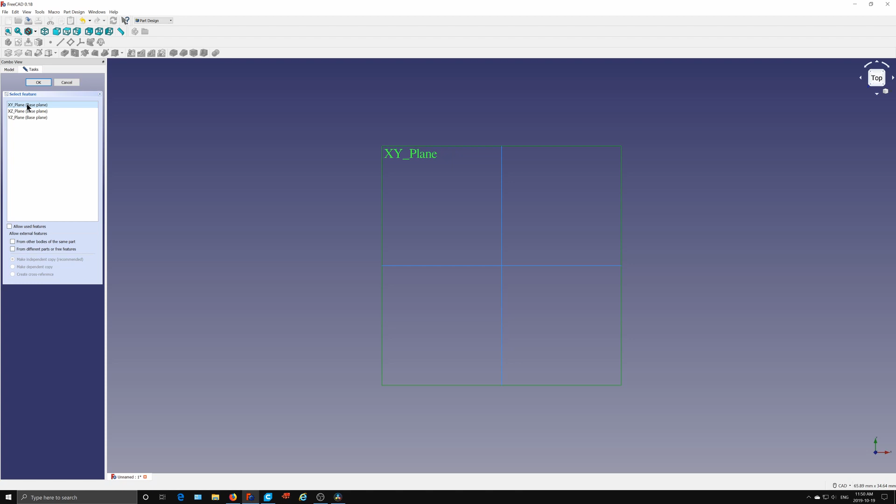To begin with, the program has to be set to this option here, part design. Now I click create a new document, then create a new body, and create a new sketch. I want to set the base plane to the XY base plane, and click OK. So now I've got a new empty drawing document.

The sugar water feeder is basically going to consist of 4 circles manipulated in different manners, and I'll show you how quick and easy it is to do this. You click the circle drawing tool, draw a circle somewhere near the middle of the XY base plane, then click on the center of the circle, click on the center of the XY plane, and click this button here which centers or aligns them. If I do that same alignment on all the circles I'm going to use, everything's going to be concentric and even to each other.

So now I have this circle on the screen. I want to enlarge the circle to the outside dimensions of the dish. I've already figured that all out, and I want the dish to be at least 5 inches across, which equates to 128 millimeters. Now this program measures the circle from the center to one side, so for 128 millimeters, I want to make this circle setting here 64 millimeters.

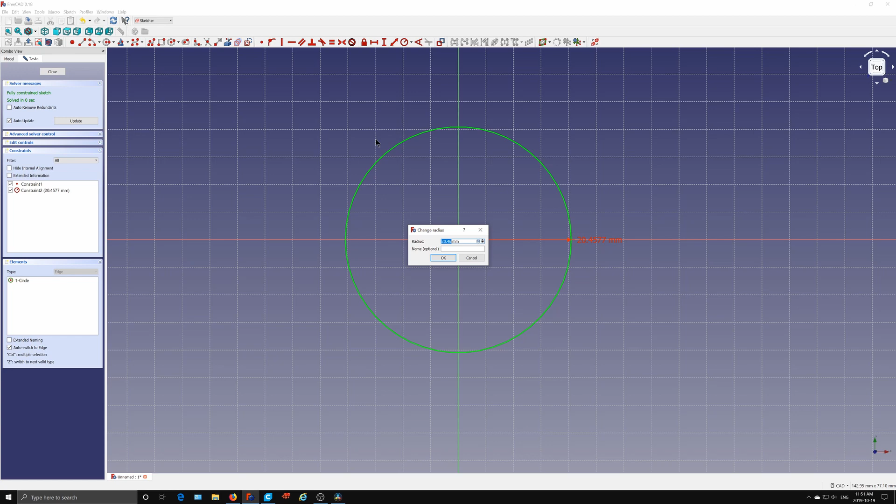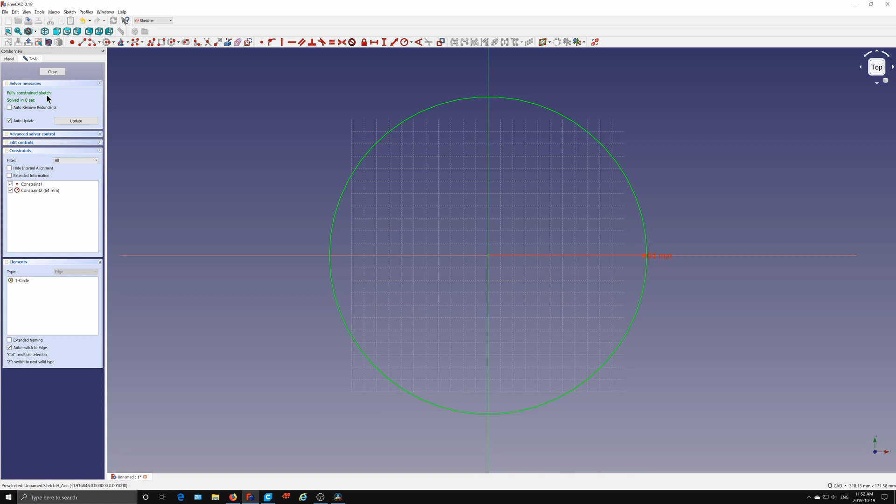I click on the arc function up here on the top, and then this dialog pops up and I can enter 64. You see that immediately enlarges the circle—I'll just zoom that in a bit. Now you see here on the top left it says fully constrained sketch, which means that's a closed sketch, and that you can do another operation on it now.

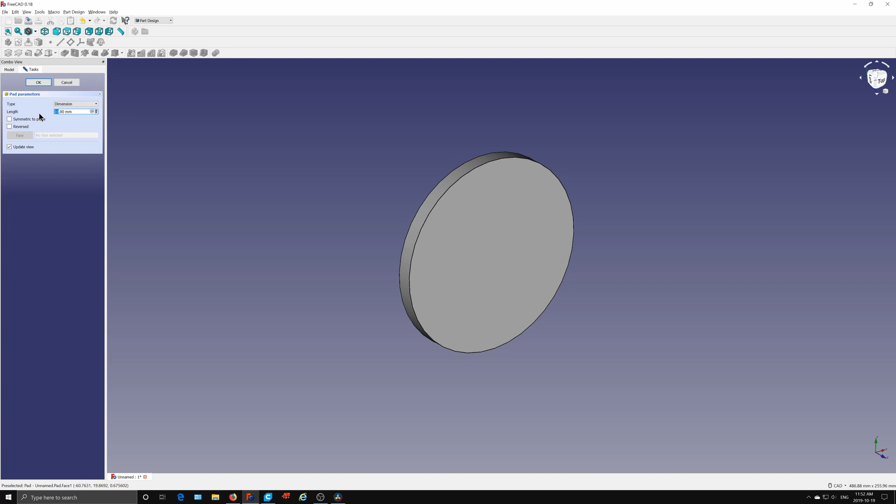So click close. Now I want to pad that circle. I click the pad function, and it's gotten big again—move it back to the center, and tilt it a little bit. Now you can see that circle has turned into a disc. The default dimension for a pad function is 10 millimeters, but I want the dish to be 64 millimeters deep, so I just enter 64, and that stretches that circle out into a cylinder that's 64 millimeters from the top edge to the bottom edge.

I click OK. Now I want to make the inside of the dish. I click on the top of the cylinder, go up here on the left, create a new sketch, grab the circle tool, draw another circle, and center that circle. Then I want to set this circle to 63 millimeters. Now you can see that circle is just shy of the outside diameter, which is going to give me like a 1 millimeter thick wall on the outside of my dish. So now that's fully constrained over here on the left.

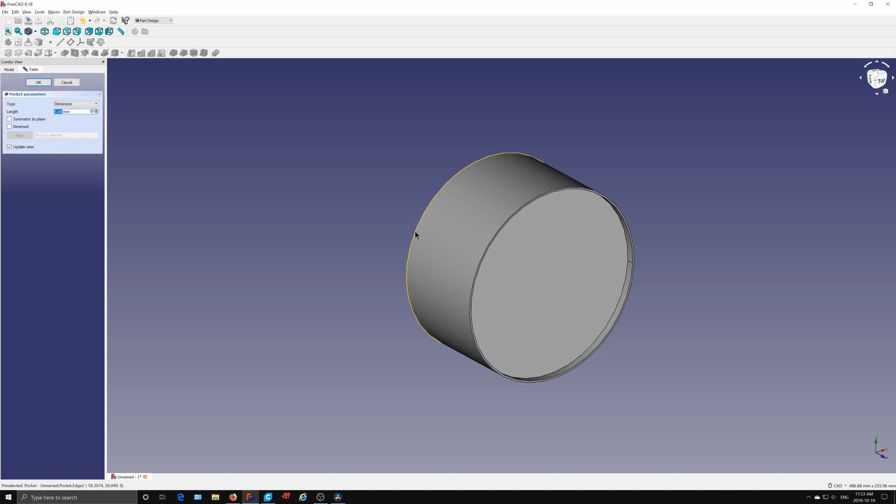So I close that, and now I want to do what's called a pocket function, which is basically going to make a hole. I want the bottom of this dish to be 1 millimeter thick. Seeing the outside dimension is 64, I want to make this pocket 63 millimeters deep. And there we have the outside of the dish with the bottom.

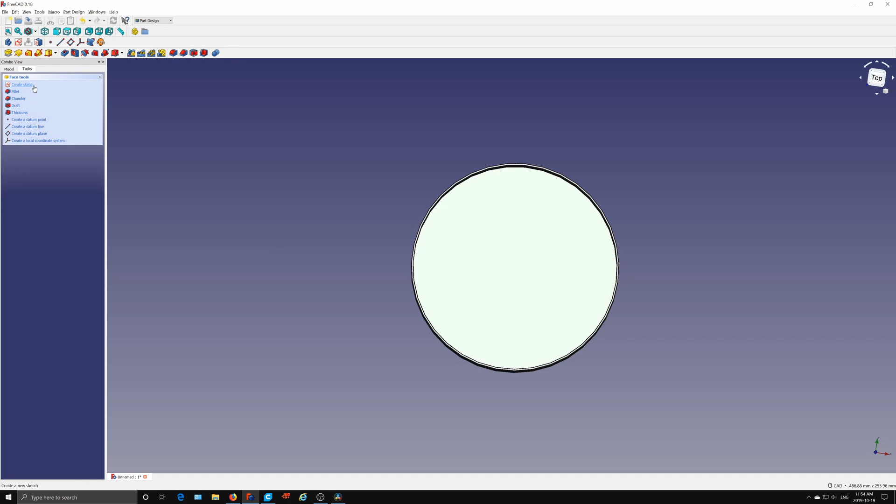Now, to make the center part, you click on the bottom of the dish, create a new sketch, put another circle in the middle here, and center that circle. Then I want to set the dimension of this circle to roughly 2 inches or 50 millimeters. So I click the circle function, and change that to 25, which will give me a 50 millimeter wide circle.

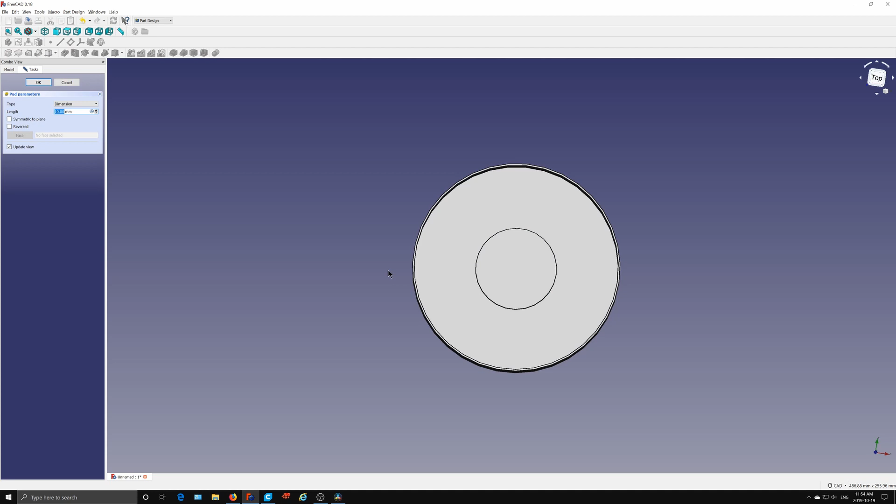Now that's fully constrained up here again, so I can do another operation on that, and I want to pad that. Tilt this over a bit. Now you can see that center has been padded up 10 millimeters because of the default 10 millimeters that the pad function does. I want this center post to be 50 millimeters high, and seeing that the bottom of the dish is 1 millimeter thick, I want to make this post 49 millimeters.

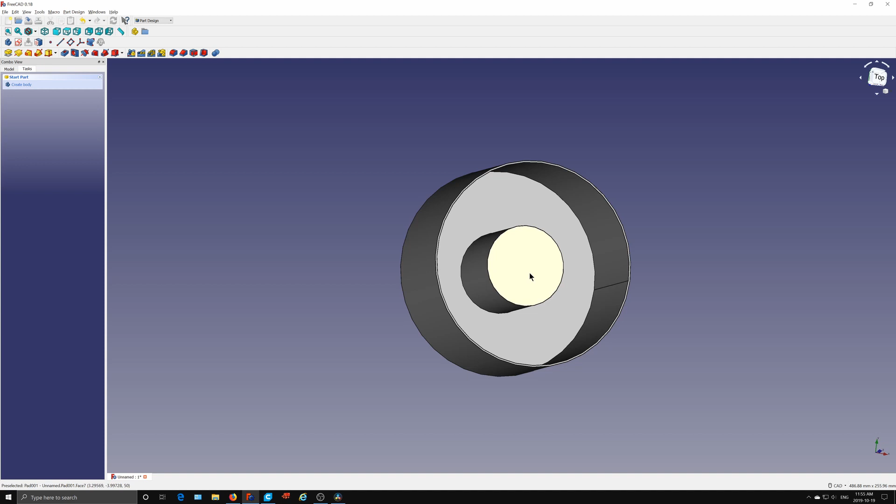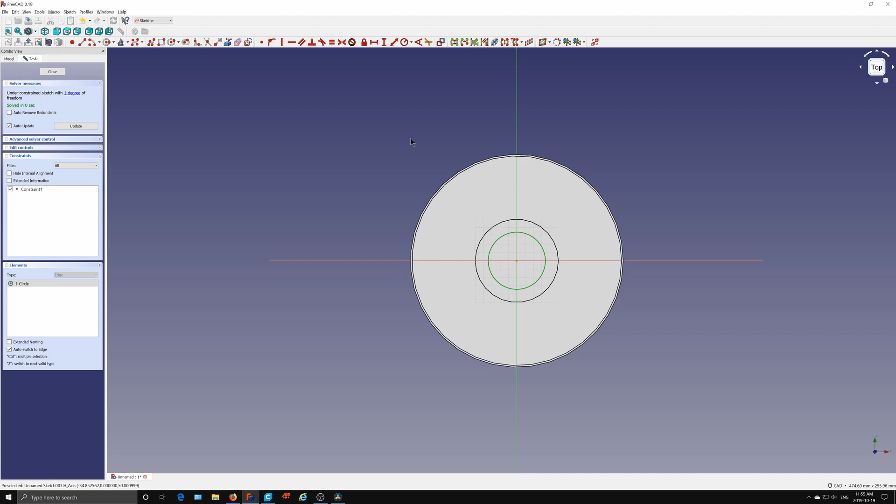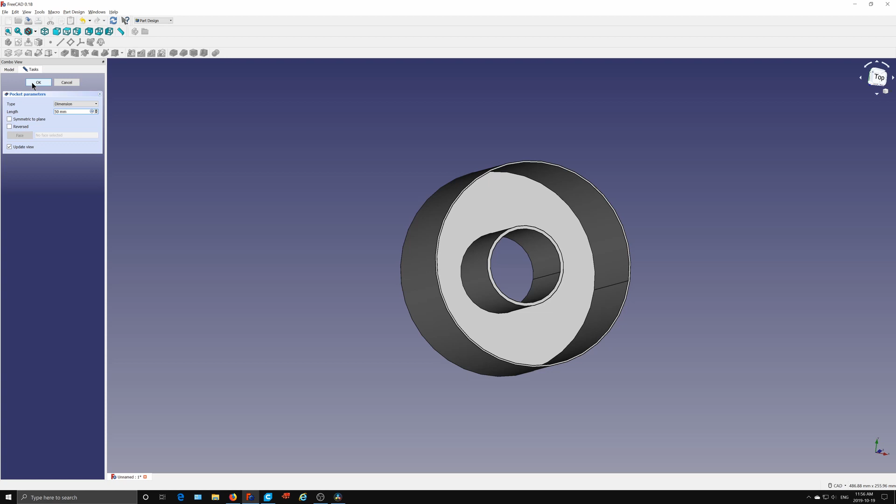Click OK, and there we have the center post. To make the hole in that, I click the top of the post and go back up here to the left, create a new sketch. I grab another circle function, draw another circle, center that circle, and make it 23 millimeters. It's fully constrained, so I close that, and now pocket that circle, making it 50 millimeters so it will stretch all the way through the entire body. I click OK, and now you can see I have the basic feeder dish.

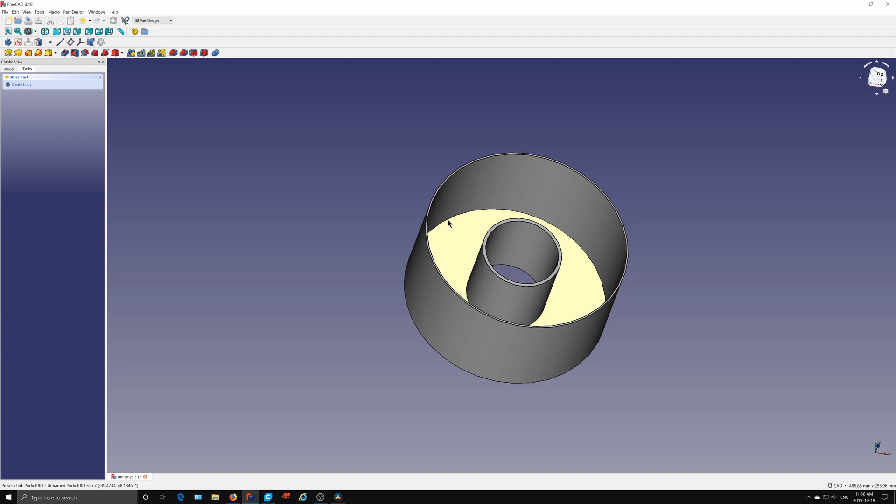The only other thing I want to do is these bottom corners where the walls meet the bottom, that's a 90-degree angle, but I want those rounded. Same where the center post meets the bottom of the dish, I want that rounded. So I click right on that line between the bottom and the side, and you can see it turns green. Then up here on the left, I do the fillet function and make that fillet 5 millimeters. You can see that's made a round section here, so the side goes down, rounds out, and meets the bottom of the dish.

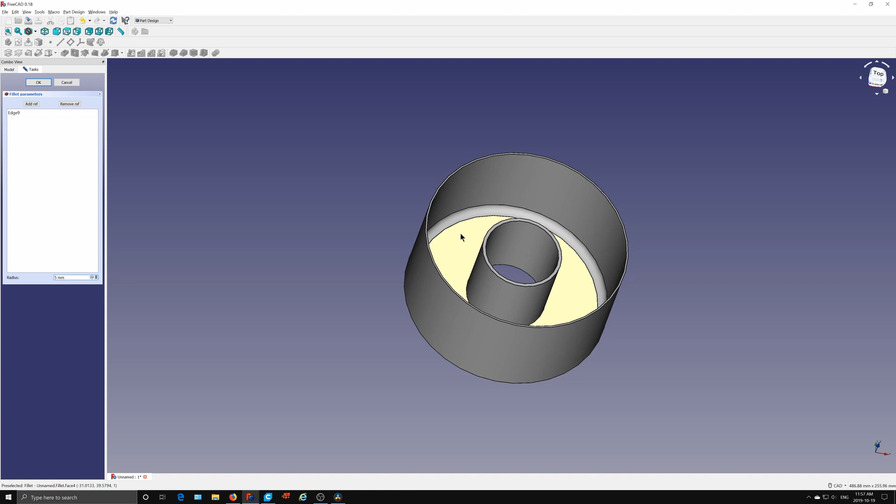Now I want that same effect on the center post here. So while I have this menu open on the left, I click Add Reference, and get on that line for the post where it meets the bottom, and put a round corner on that as well. So that's it, that's the sugar feeder.

Very simple, very easy to draw out, and when it's all printed out, it'll be very functional.

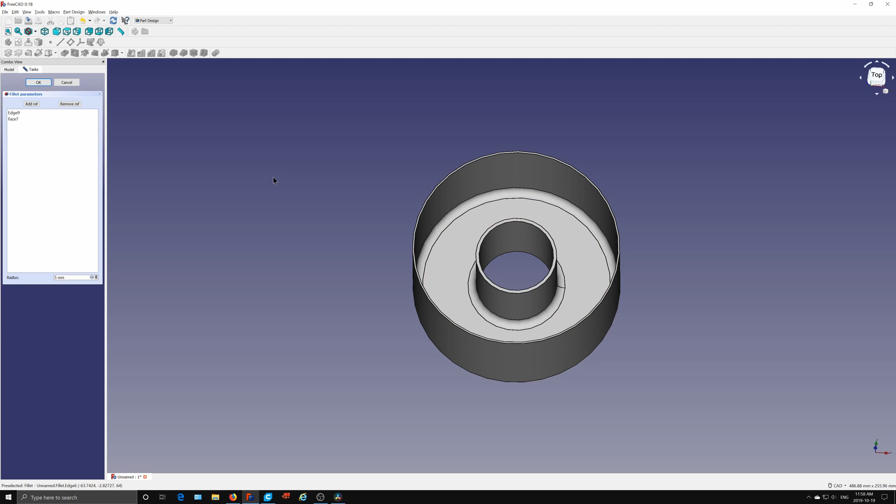So what I have to do to this now, because this is basically a solid 3D object, I have to turn it into a form that can be further processed into a code that the 3D printer will understand. So I go up here, close that window, go to part design, and click on mesh design. I'm basically going to turn this into a 3D mesh or netting of this whole dish.

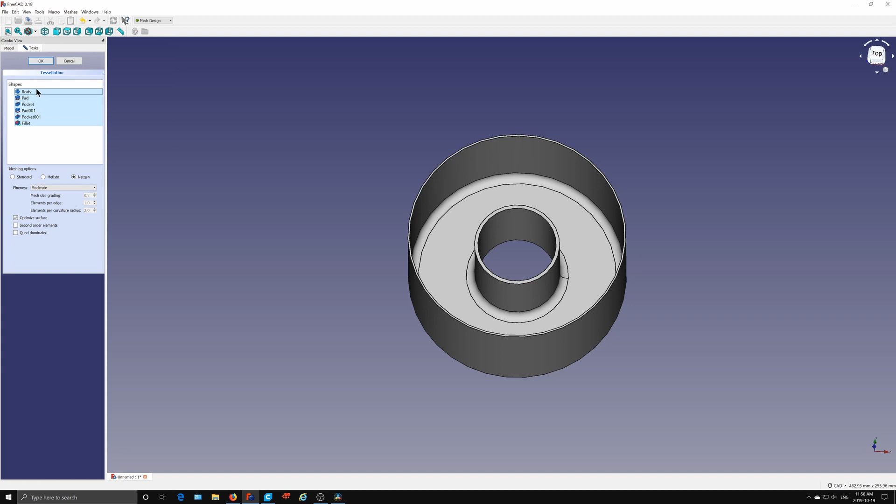So I go up to meshes, create mesh from shape, grab all of that, click standard, and click OK, and now I have a complete 3D mesh.

Now you can see in this menu here under the model, all the different parts. That pad is the original outside of the dish, the pocket is the inside of the dish, that pad is the center post, and that pocket is the hole through the center post, and of course the fillet is the round corners. So the meshing has meshed each piece of that, and the bottom one will be the complete piece.

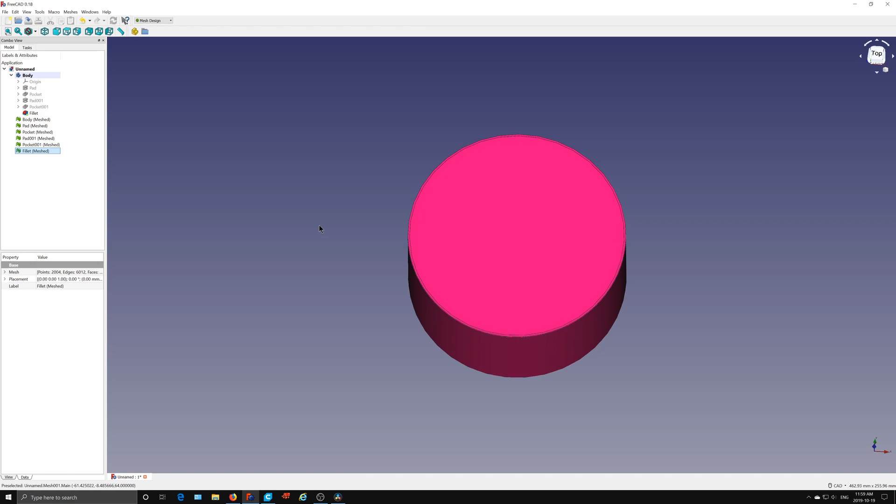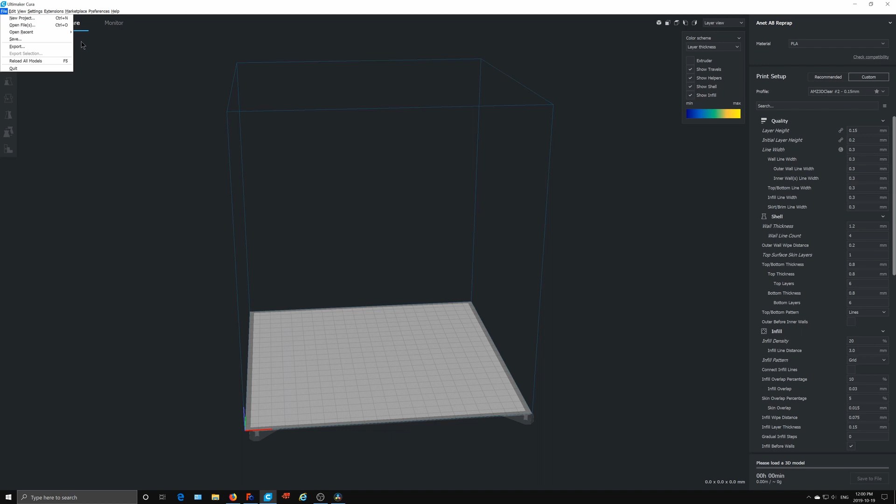Alright, so I'm back. Now I've opened up this program, it's called Cura, and it's called a slicing program. What it does is take that solid 3D model and slice it into layers that the 3D printer will understand, then produce a code that's basically a list of XY coordinates telling the printer where the print head is supposed to be at any given time. So let's go File, let's open that feeder. Oh, I got it set on the wrong view. So there's the solid view, there's our feeder.

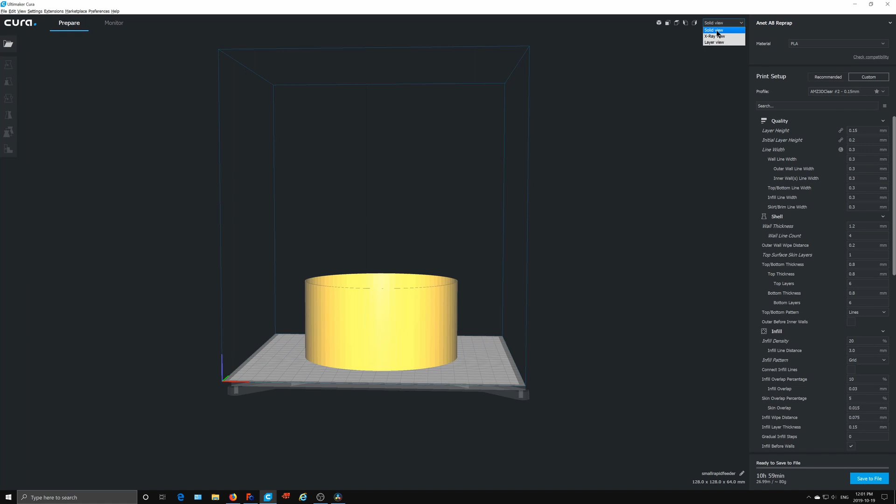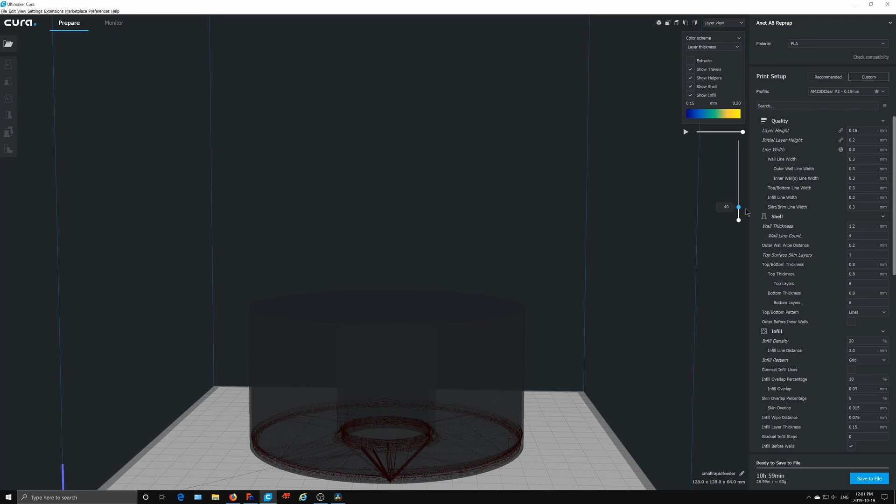And this program's already done what it's supposed to do just by loading that in there. It automatically takes that object and slices it into layers. If we go on layer view here, I don't know if we can zoom in on that a little bit, you can see layer by layer if I pull that down. So the printer is going to start at layer 1 here, and it will build this object from the bottom to the top.

And that's basically all this program does. Now it all depends on all your settings here, which I've had to tweak quite a bit to make it work. Down here in the bottom right, you'll see it's going to take 10 hours 59 minutes to print this dish. So this is one of those things you start first thing in the morning and go off and about your business for the day, and come back, it might be done.

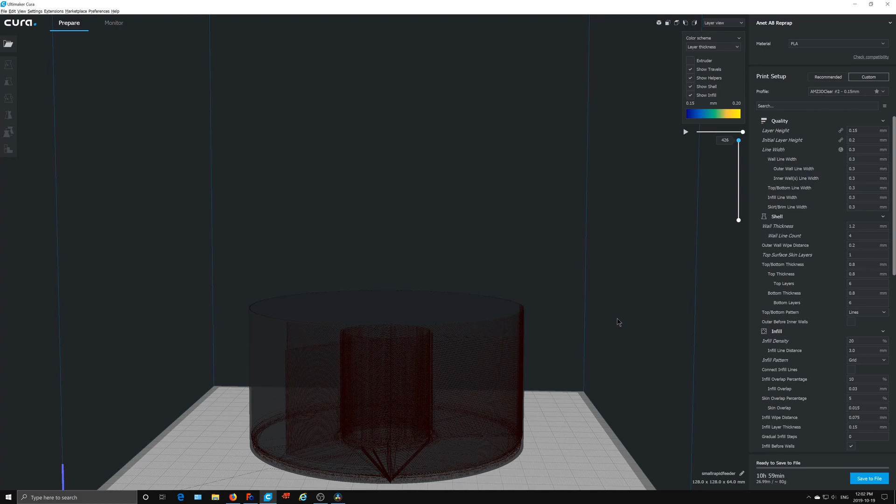Now you can either save it to a file or save it onto an SD card. I usually save it onto a mini SD card, install it into the printer, and when I turn the printer on, I'm able to read that file directly off the SD card. The printer will then start working on printing out the object you've designed, in this case the dish. I'll stop here for now and move on to the printer and other things.

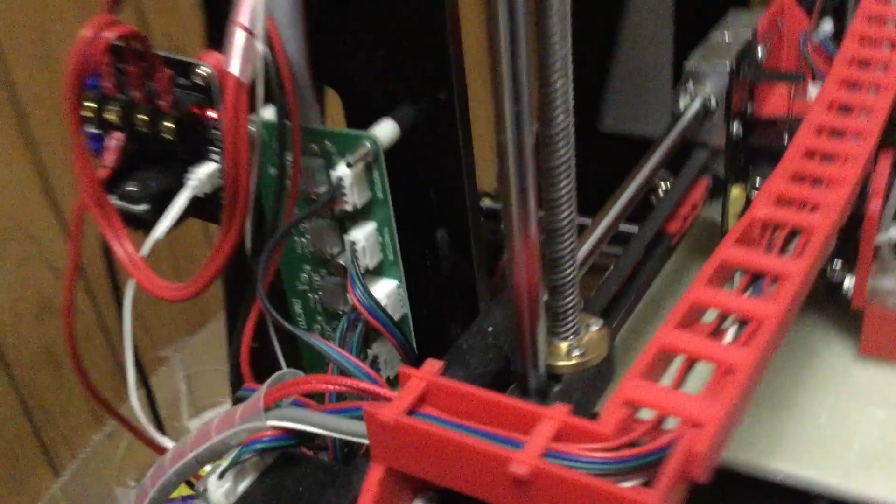So the SD card goes into that little spot down there. You just plug that in, turn the machine on, and you can read that file off of there. The printer can read that file off the SD card and print it out.

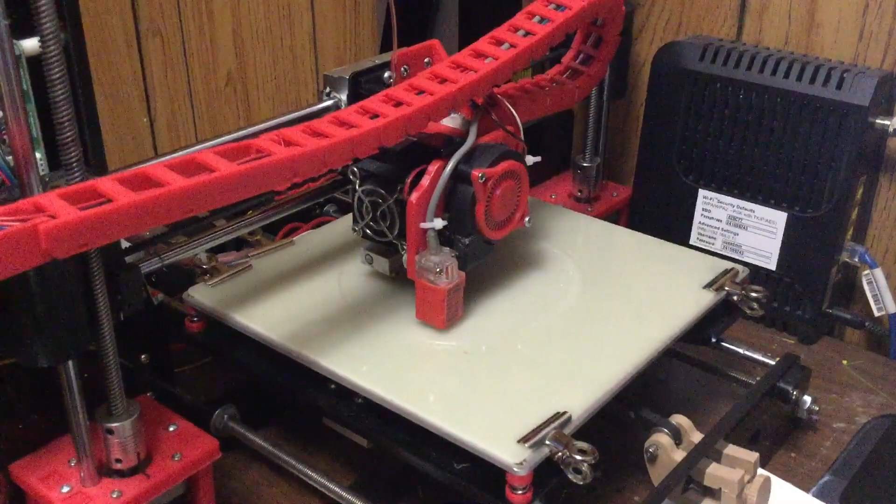Right now I've got the caps printing out, and you can see the print head going back and forth, laying down one little ribbon of plastic at a time as it moves across. That's why 3D printing takes such a long time.

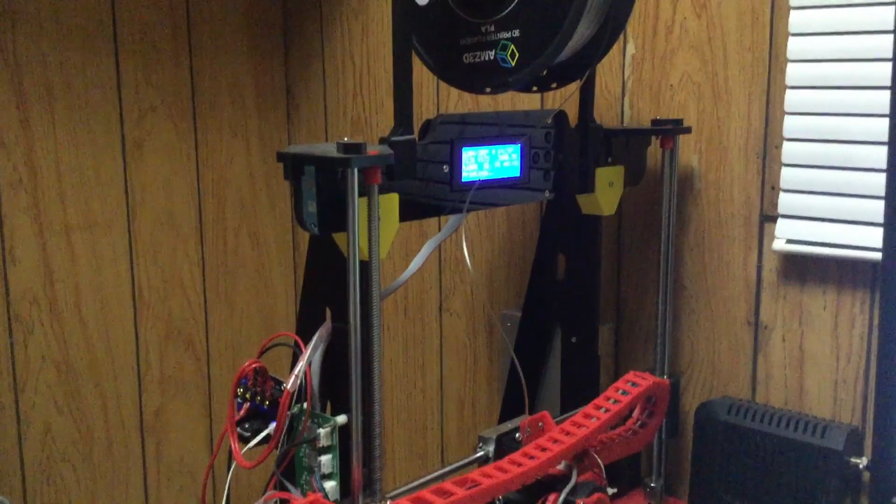This 3D printer is just a cheap $200 Amazon special, an ANET A8 replica, and I made modifications to it. The yellow pieces are stabilizers that I printed out. I had to print new footings for the vertical axis motors, one on each side.

And of course I printed out this wire chain. Without the wire chain, the wires on the top of the print head were moving back and forth because of the way the print head moves, and they were actually snapping off and causing issues. Now it seems to be much more stable.

You can see other red parts in there, like the fan shroud on the front of the print head, and there's a plate in the back of the fan, that red plate, which holds the sensor for the height adjustment.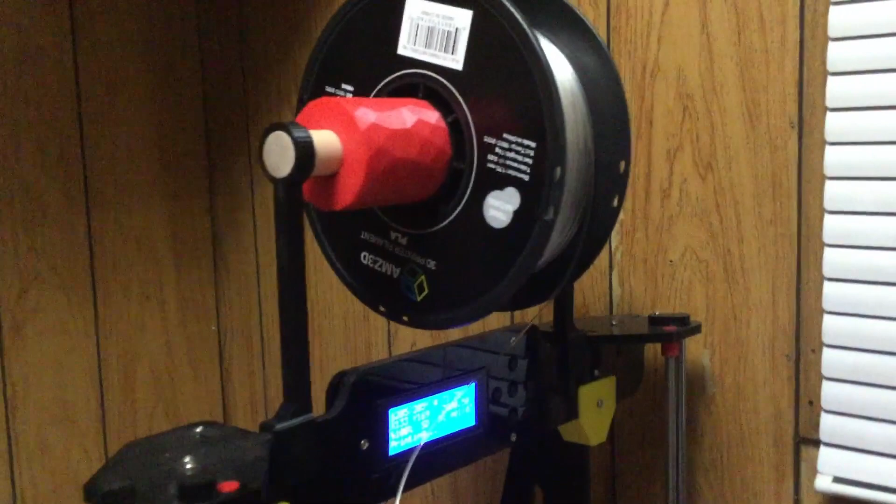Anyway, that's the printer setup. Because this is only one color, right now I've got a spool of clear in the spool holder that I printed out, and I'm printing out the caps at the moment. When the caps are finished, I'll change that clear spool for a spool of white PLA plastic, and then print the dishes out.

Once I get everything printed out, it'll take some time, but I'll add it to this video so you can see what it actually looks like when it's all done. I'll be back in a bit after everything's printed.

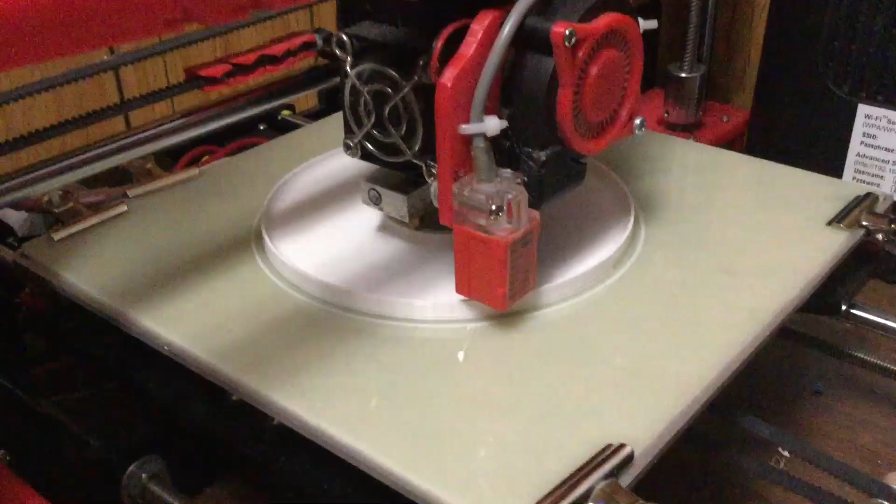Here's just a quick shot of the printer working on the bowl that I designed in 3D. It's at about 19% done. It's going to take the rest of the day to finish this.

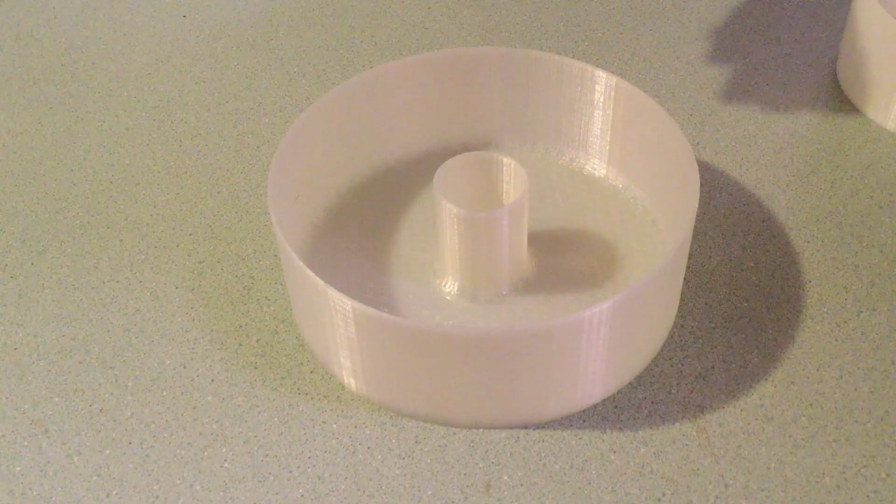So here I'm back, it's been a full day since I started printing that mini dish. What's sitting in front of you right now is the full-size dish I printed for the 10-frame hives. There's the center for feeding sugar water, and of course the cap to keep the bees in. Now here's the mini dish. You can see quite a bit of size difference in those.

The lighting's not very good in here, but there you have it. Bees just come up through that center hole, feed on either sugar or sugar water depending on the season. That goes in the center to put sugar water in, and then the bees can feed on the sugar water in the center and go back in. And of course then you have the cap to keep them in.

This cap, I'm going to redo. I don't know if you can see it too well, but you can sort of see through them. I made them a little too thick, so I've reduced the thickness in my design and I'll print them again to see how clear they are. That's the nice thing about rapid prototyping on a 3D printer — if you don't like the first go around, you can always change it a bit and try again.